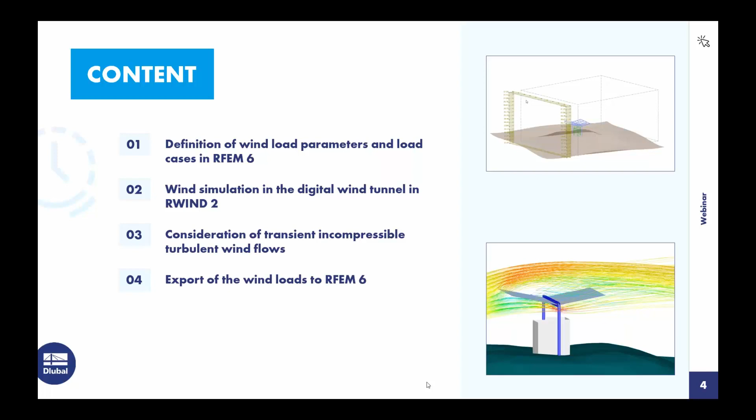So let's jump into RFEM6 and load a model. Generally, I'd like to show you directly how we can set up such a model, but I only have 1 hour for this webinar, so we have to start with a prepared model.

So this is my canopy roof here, and I scheduled that we open it in this style with rendered cross sections, with many supports, with dimensions, and maybe to start with a question - is it needed or not, or what are all these supports doing?

For questions, if it's unclear whether this symbol is needed or not, in RFEM6 we offer many tooltips - we implemented a lot of tooltips. So just draw your mouse pointer over elements that are unclear and you will get a hint what it's about. So you see here it's an effective length setting - a visualization for the buckling length input for the design.

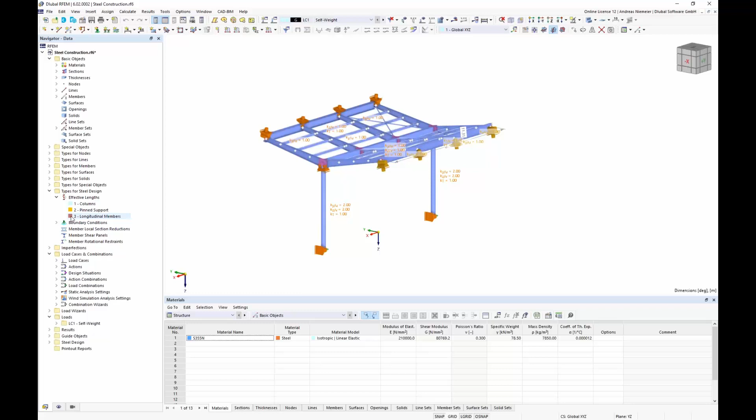This brings me to the point to show what this model is about and what we predefined. So we predefined, or RFEM6 did it already - we had here already design settings for columns, pin support members, for longitudinal members, and for the wing members. You can do a full design if you calculate all. If you don't need these symbols, you deactivate it to see what the point is.

Our model - you see we have here a circular hollow section as a cantilever column, a box section with a big torsional stiffness, and here tapered I-sections with a cap member, also an I-section, and with some filling members, what about C sections. This is our model, what we want to design today.

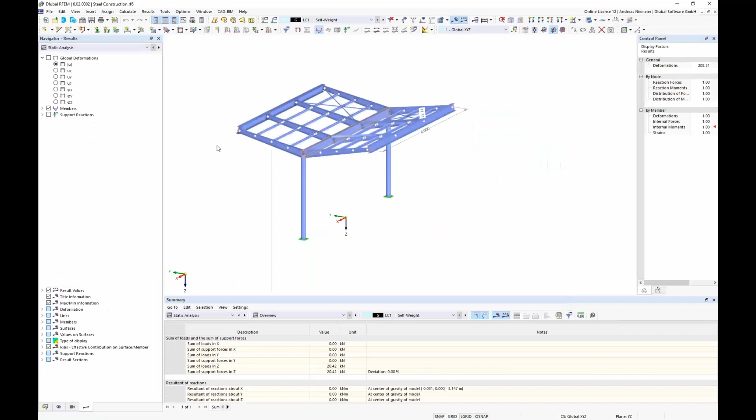If we take a look on our load case list, you see what our author of this model already did. We have here a self-weight load case, and if we calculate this self-weight load case, we get the load case results plus a steel design, meaning we get our bending moments from self-weight load case.

So you see here bending moments, normal axis forces, but also a steel design. If I calculate this model only with steel design, for this self-weight load case we get a utilization about 7%. Not much, but it's clear we don't have more loads set up.

What is the case of our webinar today? If we go back now to our load case list, we see we have to fill it to get the right design, to get the right utilization for all actions that could appear for this roof.

And we can fill it now with maybe wind load cases. So if you generally have to design the structure, you create wind load cases based on a standard. For this type of model, we know our standard offers us for canopy roofs load schemes that you can apply. This is maybe quite exhausting because you have to calculate resulting forces for every wing and set it up.

Today I want to show you how you can solve this with a CFD-based analysis. For this, you have to prepare our program in a special way. You have to specify the tasks.

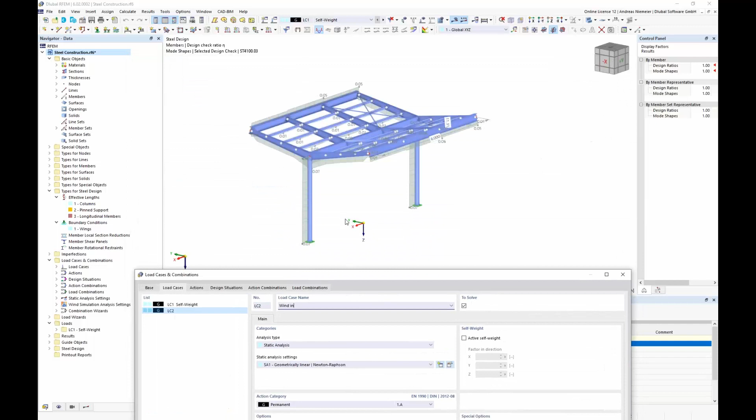For example, Wind in. The question is where, in which direction, we want to design it. Let's take a look. We see, okay, maybe Y direction could be interesting for this structure. So let's write in Y.

Okay, then as next topic we get a lot of options, and you see we have here analysis type: static analysis, maybe for pure structural calculation. But if you open this box, you will see there is a new item, wind simulation. This wind simulation is connected to the add-on wind simulation in the base data, which we just checked in the task.

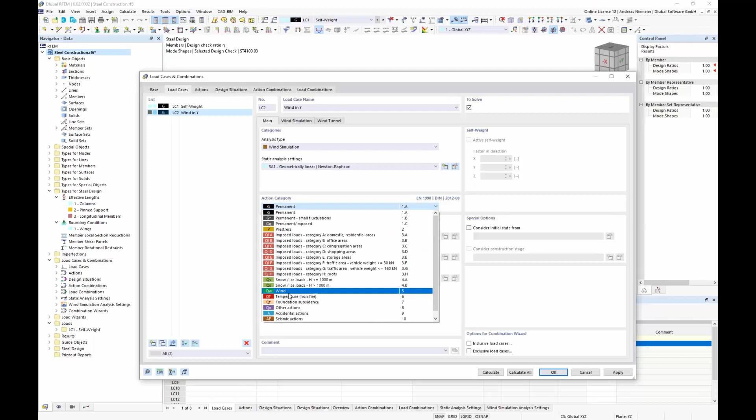If you activate wind simulation, you will get two further tabs for detailed sub-settings: static analysis setting, action category. Action category, of course, could be wind in our case, imperfection, structure modification, initial state. So you get a lot of options, and the question could arise: is this really needed for a CFD calculation? Why do I have to specify here if I want to calculate according to second order or large deformation?

I agree, it's questionable at first, but you have to know that wind simulation is a two-stage calculation process. If you calculate the load case with the type wind simulation, the program moves your model into the numerical wind tunnel, doing a CFD calculation, extracting pressures on the model from the wind flow, moving these pressures back to RFEM and doing a structural calculation for these forces. So one point is CFD calculation, the second is structural calculation. Therefore you have to specify static analysis setting, imperfections, and so on.

Then let's take a look at what is hidden below these two tabs: wind simulation. Of course you get a setting about the CFD calculation itself. Here you see, do we want to make a steady flow or transient flow analysis? So we can say, clear, maybe we call this setting steady flow.

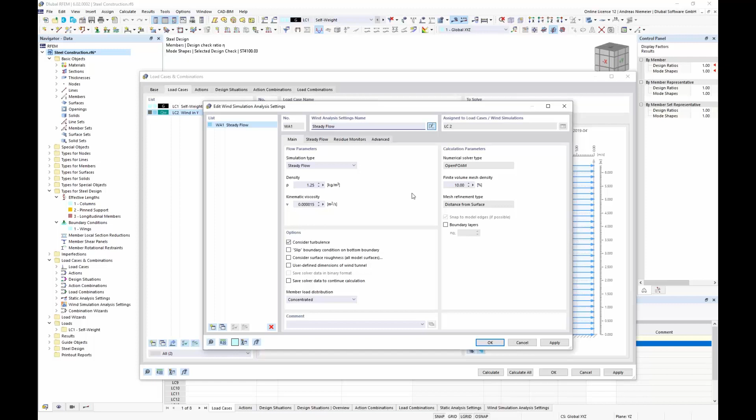Then you have more sub-settings about the steady flow itself: how many iterations, the turbulence model, the accuracy, how big the residual pressure should be, and some advanced settings. So here you specify all calculation parameters for the CFD calculation and can give the setting a name.

Then we specified how the calculation should be done, but the question is, with what the calculation should be done. We know CFD calculation is something like a numerical wind tunnel, and we have to give the program feedback on what it should send into the wind tunnel. Of course wind, but with which speed. Here you get an option to set a wind profile as boundary condition for the wind tunnel.

If we check this data, you will see you have two options. You can pragmatically define this wind speed and turbulence diagram by giving table values manually, or you can create this wind speed diagram based on a standard input. We know all countries have some standards for describing wind loads on specific sites, with existing wind zones or whatever, and according to this data you can create such wind speed diagrams.

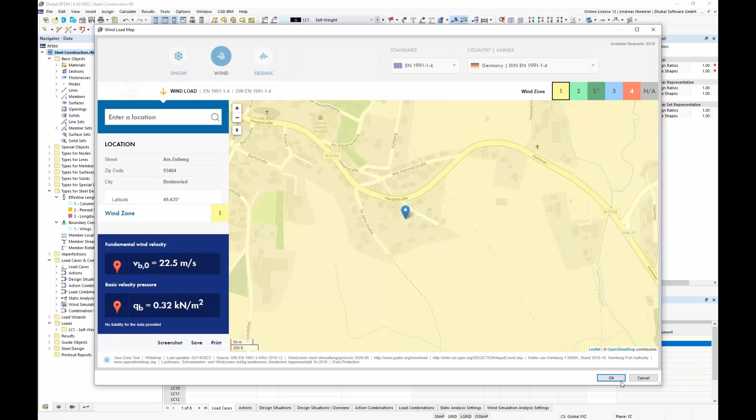We coupled this information of the standards with a map, so you can also click the place on the map. Let's simulate our model in the garden of our boss. Let's search for the place of our company here and zoom in, and place this model here. This overtakes the site-specific data with geo-coordinates, with address, with altitude.

So you can say if the turbulence should be constant or not, and so on. So you specify the input for the wind tunnel. And by confirming this window, you have overtaken it into this setting. Then the program needs, finally, one last piece of information.

We wrote it here in the text: the wind should run into or flow into y direction. It's only a stupid text here, but you have to define the direction of the wind. It's a clockwise direction about Z, which means 0 degree is in X, so 90 degree is in the Y-axis. Now the program knows everything to do such a calculation.

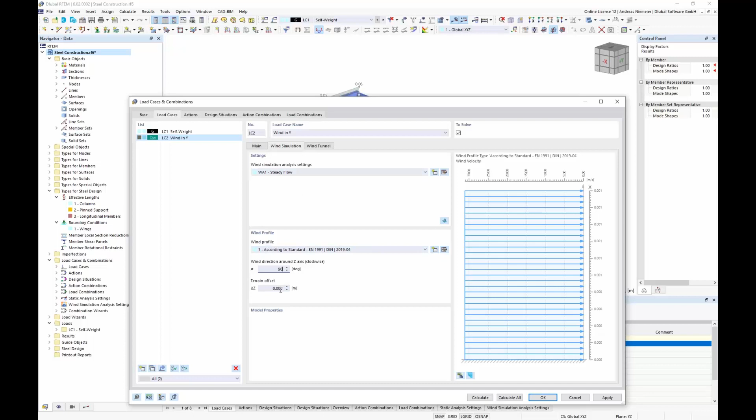So he knows the calculation properties, he knows the wind speed, he knows the inclination, and in the last tab he only informs us about the size of the wind tunnel, because we selected an automatically defined wind tunnel size detection based on the model. So here it's only information about the sizes of the wind tunnel. And if we confirm this window, the program will update the load combinatorics and draw us the wind tunnel in the graphics. You see wind tunnel, input wind speed, and here is our structure.

So far everything looks nice, and we can press the button calculate, of course. But I don't want to do this, because we want to speak about wind simulations in our programs, and I want to show you what is behind. So let's do this two-step calculation of wind simulations manually.

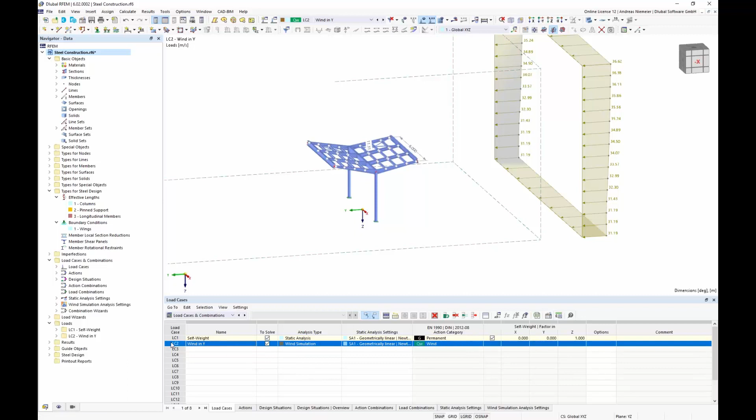In this case, I open the load case 2 again and open the sheet wind simulation, and you see here a hidden button. This button shows us what will be transferred into the numerical wind tunnel. Let's open this. You see here we have our wind tunnel with terrain, with model, entrance, with all properties — steady flow, flow parameters, all calculation parameters — all this stuff is defined here.

And we can start calculation, so I do this, start calculation. This is maybe what is behind: if you press calculate in RFEM, the program will move this model here into the wind tunnel and will press the button calculate.

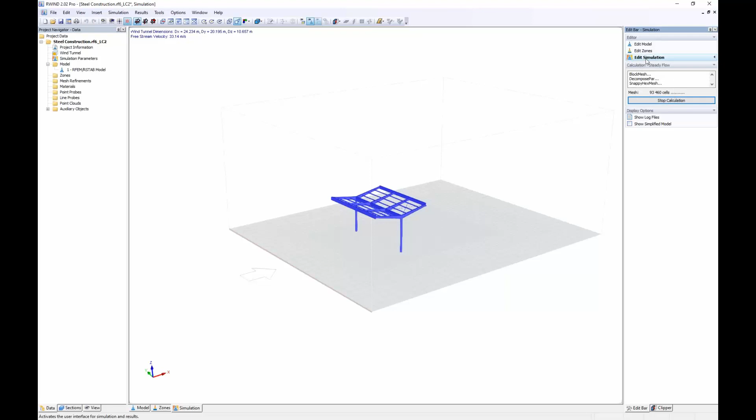Then the process runs down all these steps — it creates a shrink-wrapping mesh around this sharp-edged model from RFEM. We call this a simplification step, and we do this to make it windproof. If you see such things here, this comes from the rough modeling of a structural model, but we don't want the wind to go inside, so we make it windproof — we bind the foil around it.

With this simplified model, which we create from the sharp-edged model, we can create a mesh between this simplification and the wind channel sides around the model, and calculate the flow around the structure according to defined calculation parameters — here, a steady flow.

You see, the process is already running. It's an iterative process, and it ends once it reaches the predefined residual pressure. After reaching this, it will calculate the pressures on this shrink-wrapping mesh around the model, transfer them to the real structure, and prepare forces for the further structural calculation.

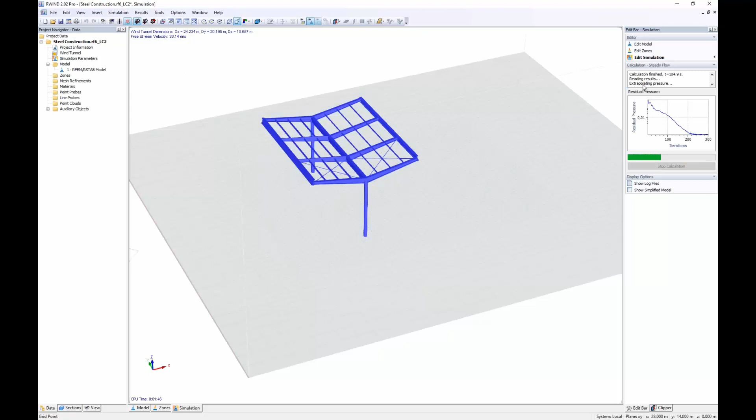So now he finished. You see, he's just starting the transformation or extrapolation process to the original model, preparing graphics, and now he asked me a question: should I change back to RFEM?

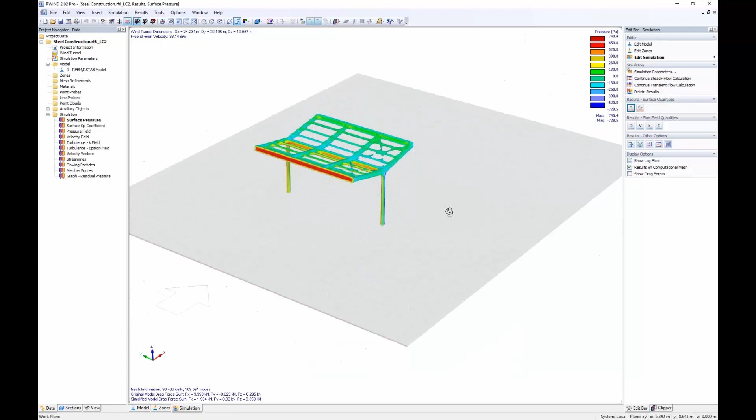Of course we can do this, but we want to take a look inside at what happens. Let's look at this shrink wrapping mesh I mentioned - this is the model simplification. The program makes it windproof by binding a foil around it, calculating the wind flow around this model, and creating from this flow pressures - a pressure skin on this model. These results will be used in RFEM for calculating the structure itself with the wind loads.

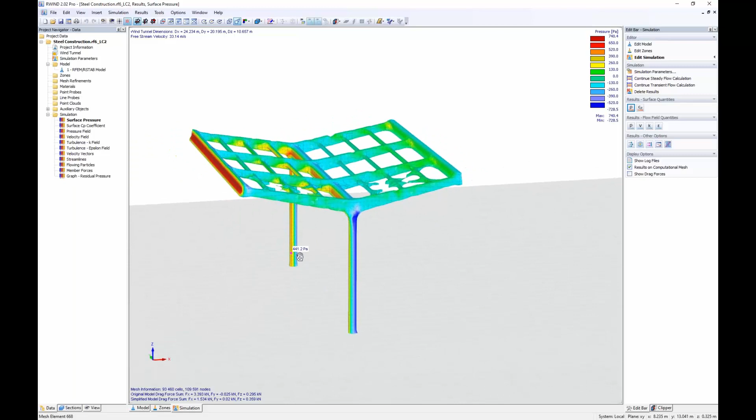But what you see now, and this was my target - if we look at this member structure, we see it binds this foil around, but we also see the wind flow is running through the model. You see it can go through the roof, and this is not real. Structural engineers create these structures without a cover, but in wind calculations you need a cover so the program knows here is a cover and the wind cannot run through the roof. So this is the point I want to show: if you work with structural calculation models in wind tunnels, you will always suffer this problem that wind can run through your model, even with all the tools the programs offer.

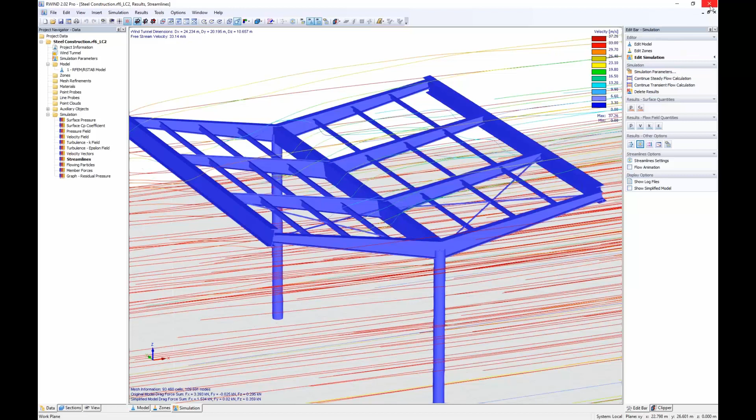The interfaces will only transport the data you send in and not more. So you have to prepare your model for this type of calculation. Here we placed some really powerful features in our new generation to solve this task. So I cancel this calculation, close the window, close this, and go back to RFEM to check how we can solve it.

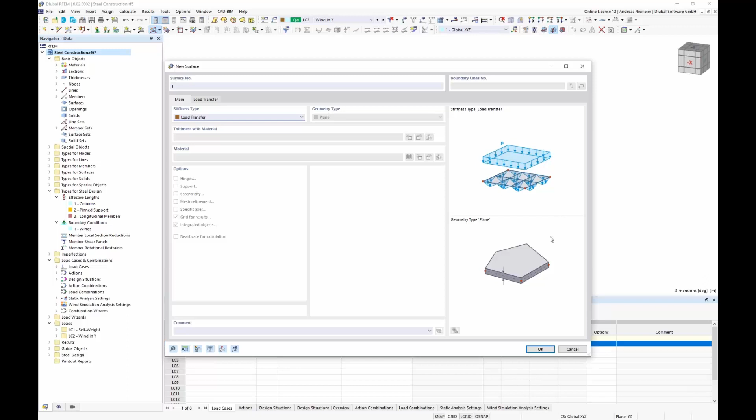For this task we invented a new type of surface. I changed to wireframe model, and here we select boundary and select the stiffness type: load transfer surface. You see this is a surface type with no stiffness, so it will not brace your structure. It only takes loads and transfers them to the members that belong to the surface - which is exactly our topic.

So let's select these boundaries and place the surface inside. Of course the program will delete the results, but this is quite normal here. So now when we turn on rendering, you see we have this surface inside, and we can go ahead with our wind calculation.

But at the moment I said this surface has this property, I haven't shown you how it works. So let's take a few minutes to explain how this surface itself works and what features you have. The first feature of a surface in member structures is that you have a coordinate system of the surface itself, and this gives us the option to orientate members according to this.

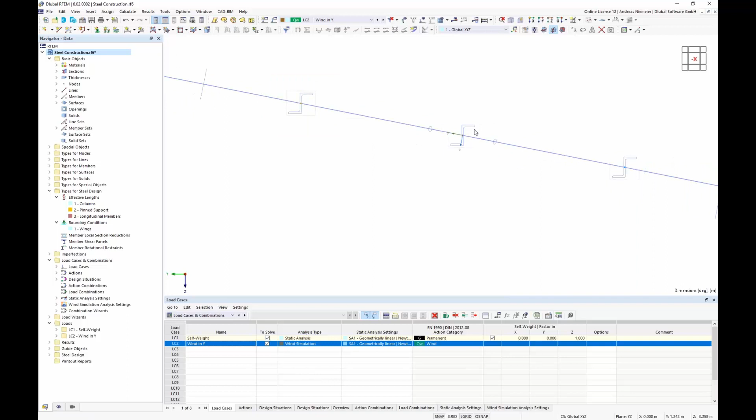So if we check the input, you'll see - oh, the author of the file didn't place these members right. But we can select it now and right click, properties of members, edit, and go to rotation, and you see we have rotation types: angle, and also a help node, which almost all programs have. But we also now have 'orientate according to surface', according to this surface. And this is a really powerful feature because now the members orientate according to this surface.

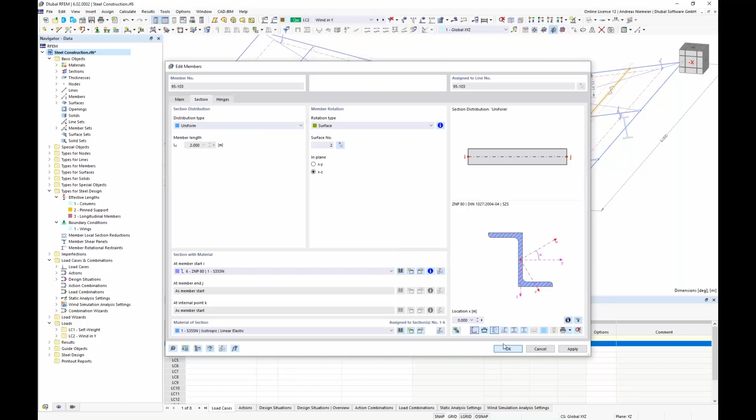The same applies maybe for the other wing side. So select all three stripes, members, edit, and go here to section, surface, and pick this surface. And without calculating any angles, you can place the members in the right place.

Then let's take a look at the power of the surfaces itself. For this, we move load case 2 to 3 and make a gap here. And we say okay, we place here, for example, a snow load, and give it action category snow. Now let's define some snow load to show how this surface is acting.

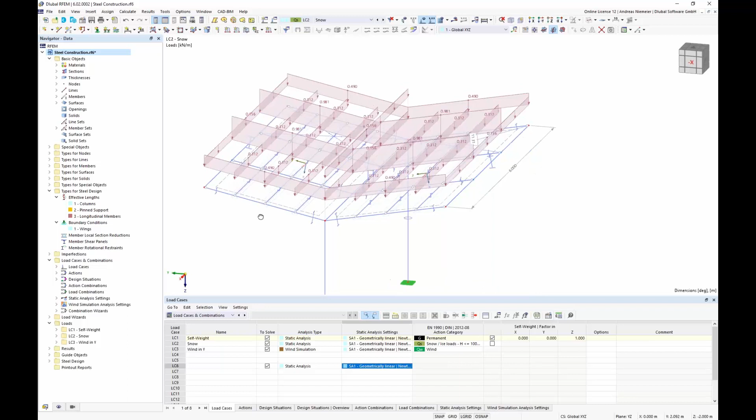Now here we say snow loads are always projected, so projected in Z direction with maybe a unit load of 1 kilonewton per square meter on both surfaces. And you see the program automatically distributes the surface load to line loads, but on all members - not only on the members that would take the load in reality, but on all members that exist.

And here we have some properties of the surface. You see here you can control the view in the navigator. This is our basic load and it will be distributed like this.

And if you want the load to be distributed only to specific members - for example, we want to distribute it in the Y direction - we go to properties, surface, edit, and say load transfer, transfer it only in Y direction, and also give the surface a weight of 1 kilogram per square meter. And you see the view has changed. Now the program changes the snow load to apply only to these filling members, and the filling members transport the load to the wing members.

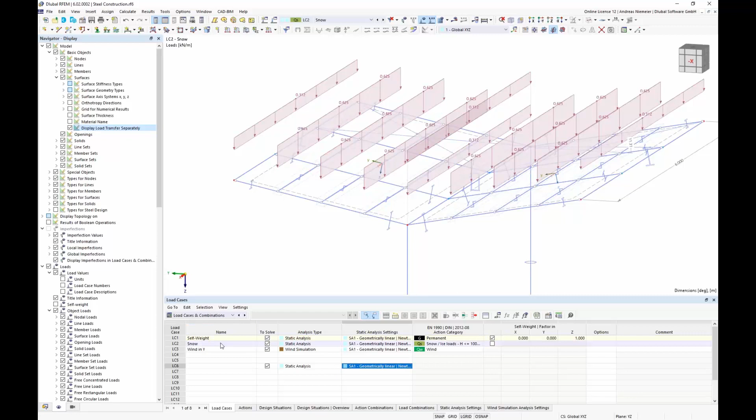And even for, let's say, surface weight, you see this 1 kilogram is distributed over the surface. So the load transfer surface can act integral over all load cases, not only for surface weight and snow, but also for wind.

And this is maybe the target. So you can create now wind models having these surfaces inside. If you check, you see now we have a surface inside and it looks quite good for our simulation. We have a compromise between wind model and structural model.

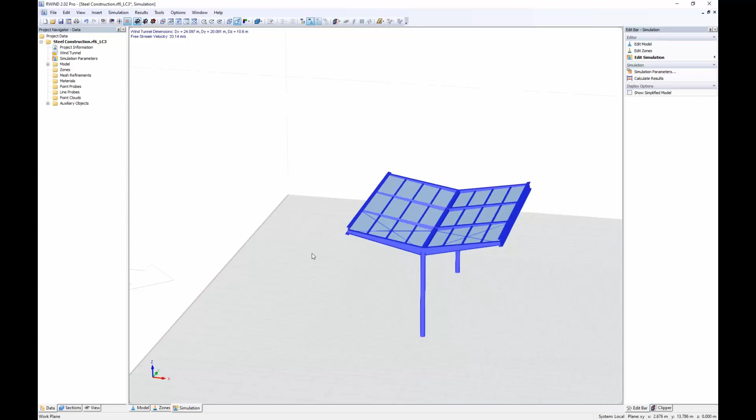But if we take a closer look, we will see the wind tunnel only sees everything. It cannot differ between surface and members. The question is, what is now the point? Generally, the wind will act on the surface, and then the surface gives the loads further to the members. How can we give the wind tunnel this information?

And here our team also invented a new feature, or let's say prepared it. I close this application again, I don't want to save, and jump in. For this we have to open the mesh settings. You see in the mesh settings we have a further tab, wind simulation.

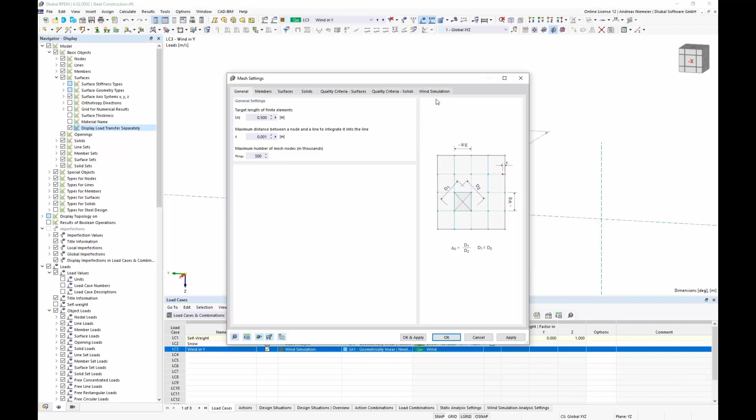This tab rules everything that is transferred to the wind tunnel. It checks the size of mesh, of this shrink wrapping mesh. It rules the mesh near the cross section, if the sections are meshed correctly or maybe quite rough. And here we have a function for which elements will be moved to the wind tunnel.

In this case all active elements are checked. So this means if we say please move only this column, and this column, and these two surfaces, if we make this only visible, then start the wind process, then only this model will be analyzed. And this is exactly what we want in this case. So if I start the calculation here...

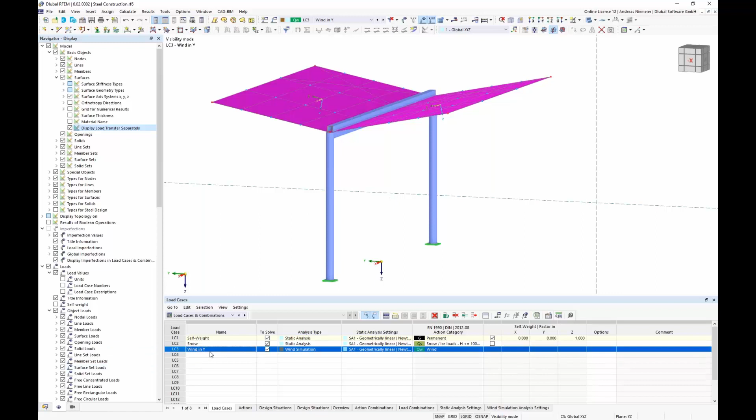Run analysis, from RFEM you see the difference. Here you see two calculation processes. This is a two-stage calculation: at first it's doing the CFD calculation, and in the second part the static calculation.

Always what you select you will see in these information windows. Of course, because we changed the elements with the surface and members, you have to do the shrink wrapping meshing again, and also the CFD flow again. And after he gets this, he does the static calculation.

And to make it more comfortable for you, we transfer even the in-time calculation information, something like this convergence diagram, which is pure information from the RWIND program. We transfer it through our programs so that you see also the reaction of the calculation directly in our program, though they're two independent programs.

And this helps always to understand, do I work with the right model, or is there a convergence issue? I have to stop calculation, whatever. So everything is possible here.

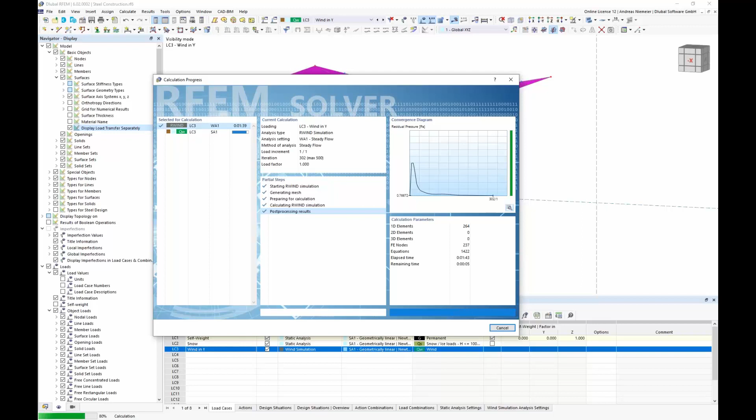Generally, what is important to know, if you're doing calculations with RWIND, it's possible to cancel these calculations and the intermediate results remain. This is especially interesting for calculations which take longer time, so you don't have to wait until the final residual is given—you can stop it before.

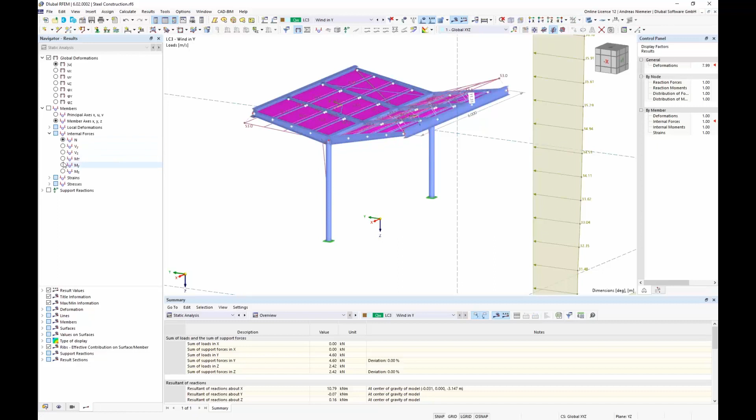But now we define such a rough mesh to have a short calculation time, so that we get directly results. And you see here the program ends up with, let's say, a deflection of everything with forces in the members. So this is the static structure calculation.

But let's make a short check if it worked with the right model. Open the internal information, and you see, okay, the program calculated the structure only with the surfaces and the members, and you see we have our suction on the top, our pressure on the bottom, and the net pressure will be taken over to RFEM. The wind flow is now not through the roof, but on the side, on the upper and lower side.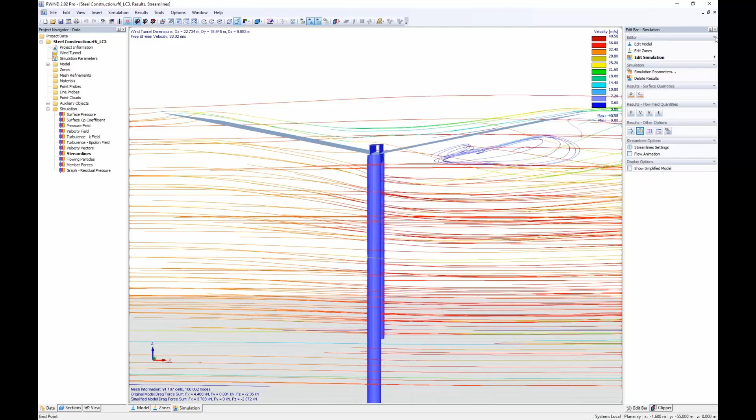So now when we're using these results in RFEM, you see that we get these forces here. And what is interesting, or what I want to show, is if you go to visibility only for the C members, you see these members will get the force from the wind loads. You see here our shear force diagram.

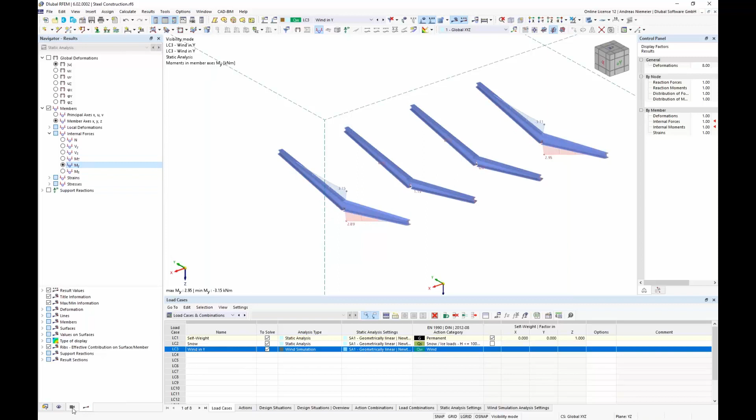You see it working like a continuous beam because I defined scissor hinges here. And finally, they will give their loads to these wing beams as a shear force diagram with a further bending moment. And in the next instance, the columns, or maybe over the box section, the column will get the bending force from the final wind load.

So all this is one integral process, and with this wind load case we can update our load combinations.

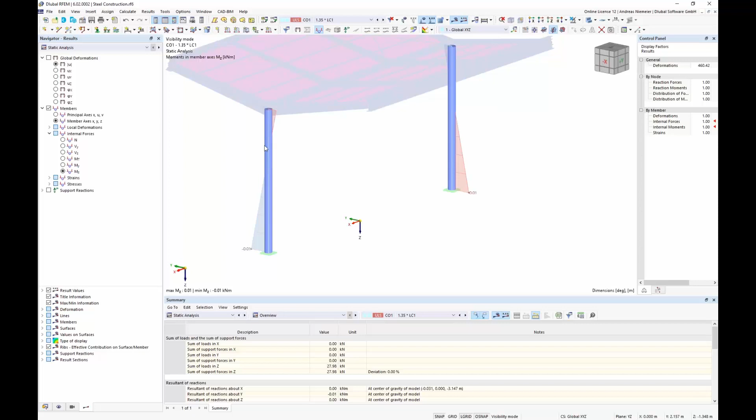So when we go here to our load combinations, the combinatorics will update them, and if we calculate all, we can calculate a design result from these new wind loads. This is the power of RFEM 6, that even the design runs in the background without any action from us as users. Besides static analysis, we get still design, where the program draws a utilization diagram over everything on all members.

If we go here to result by member, you see our biggest result is now almost 50% by considering this wind load case and snow load case we just defined. So now we can sum up the calculation and do the rest. But if we talk about canopies, we always talk about how much wind can flow below the roof, sometimes there is maybe a shading or whatever.

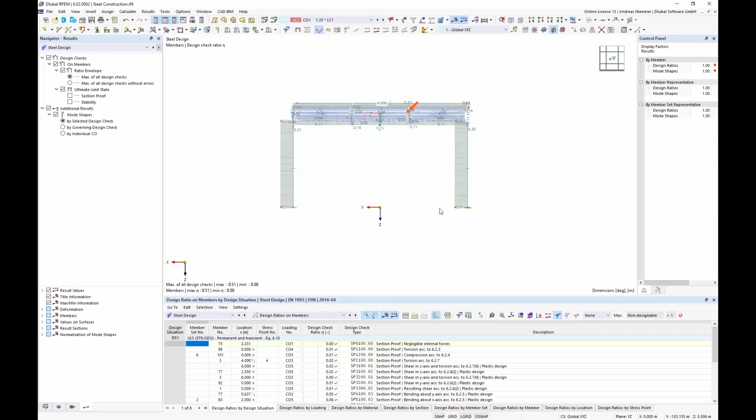I also got some questions in the past about whether we can simulate shadings in RFEM and how we can do this. We talked about it as a team and how we could solve this, and we know RFEM could be used quite well as a modeling machine in this case, so we went in this direction. For example, if we have a shading inside, we can use RFEM for it.

So let's copy these 2 points here and go into a new model, shading 1, and model a shading to see how it looks like. I only have these 2 points so I know how big the shading should be, and let's draw a plan view of this shading.

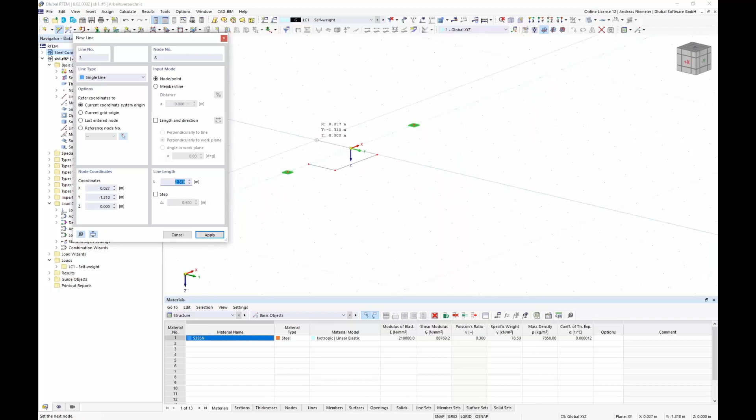Maybe if I compare it with a railway station, you always have such a shading with cavities where people can sit. So we simulate it 2 meters high, maybe minus 2 meters, and copy this step with surfaces, and we have here something like this, a shading box.

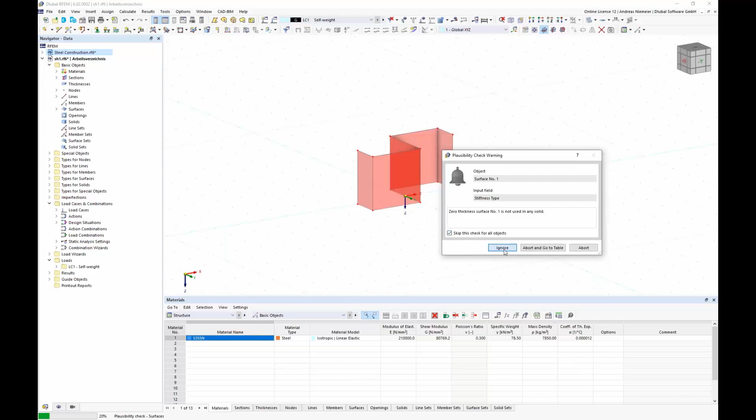This shading we want to simulate in our wind model. For this we create an IFC file from this model, which is really new in RFEM - we can create IFC files. Of course the program warns me because the surfaces have no thickness, but this isn't important here because we're only producing wind models.

We store this shading on maybe the desktop, SH1, store, and now we can go back to the steel construction model and insert it. So we import here an IFC, SH1, and overtake it. You see we have the shading now inside, and it's not a surface, it's an IFC model without stiffness. We get it here in a specific BIM navigator where we can also deactivate and activate some surfaces, but this model could be used for our wind.

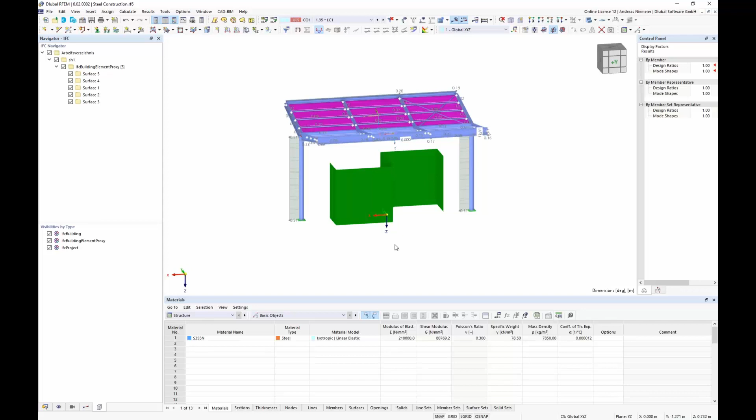As mentioned before, we have mesh settings where we can rule which elements will be moved into the wind tunnel. So if we go to the mesh settings and say wind simulation, surrounding model, all IFC objects, OK, and check our wind input like before, what will be moved into the wind tunnel, you will see we also have these shading elements now inside, specified as a separate model. Here my RFEM model, here my shading element.

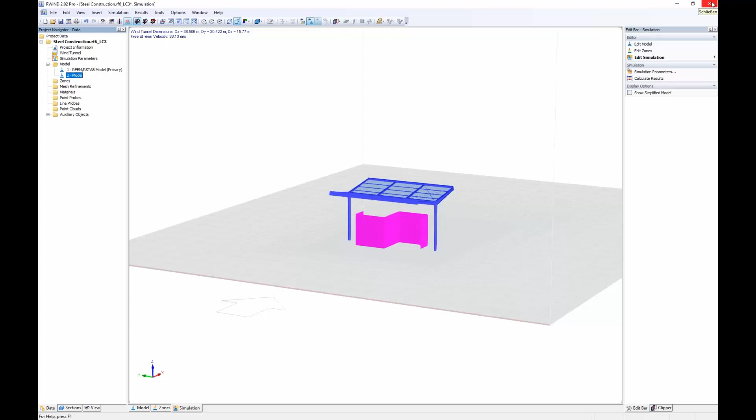This is possible, but this brings me to the question: what about my terrain? We have shading elements, but you can also ask me, can I simulate the terrain? Yes, of course. And should this be defined in RWind or in RFEM? We took care that you can also define terrains now in RFEM. Let's take a look at how this is working.

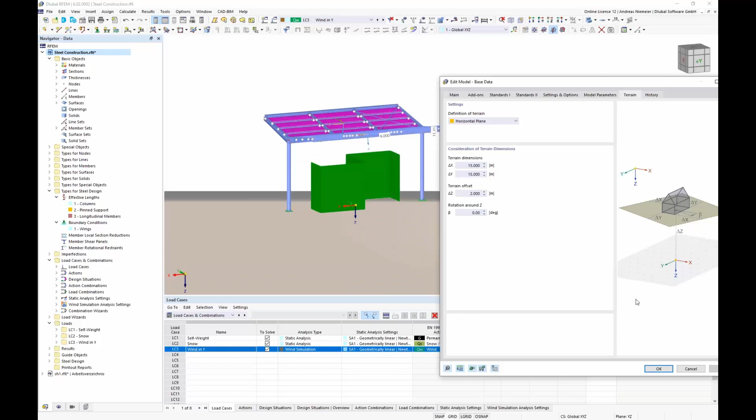Because terrain is quite a global setting, we placed it here in the base data. You see you have here a tab for terrain where you can say I have a horizontal plane - we can set it here, we can move it, we can say move it 2 meters down. Or we can say let's take an inclined plane by defining a coordinate system which we rotate maybe 5 degrees around X. So all this is possible.

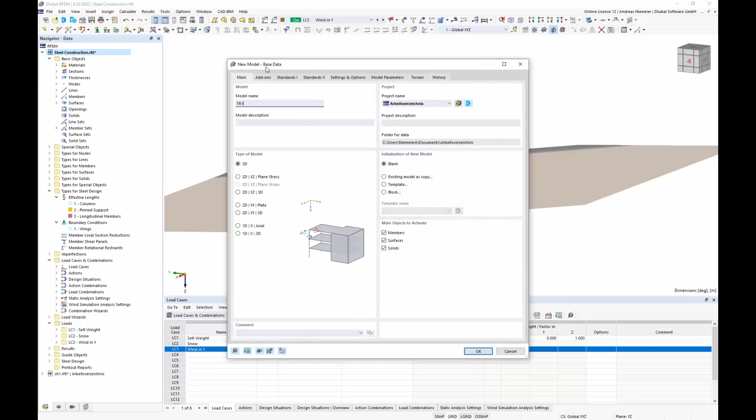We can specify shading elements and terrains in RFEM. And if you say I have a more complex terrain, not only a plane or an inclined plane, that's also possible. For example, let's model a terrain, and as mentioned before, you can use RFEM as a modeling machine for it. So let's open a new model, TR1 for example, and specify a grid of nodes.

Maybe I know for 15 by 15 meter quadrant segments. So let's copy this node here 3 times in X with 5 meters - you can also use 1 meter, but it's up to you, it's just an input - and here with minus 5 meters. Let's take all, copy this row 5 meters in Y direction, and now finalize it here with copy in the minus direction.

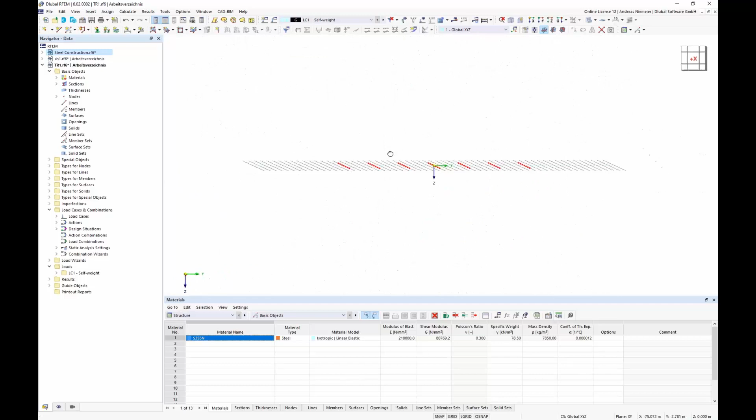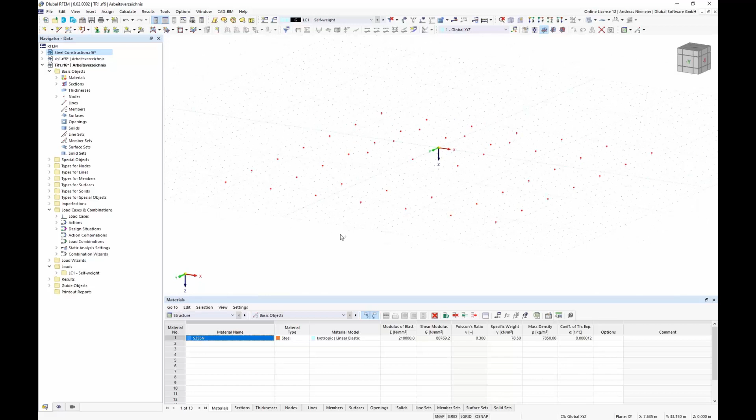Now we have all nodes in this scheme here, and we can model a terrain with these nodes. So for this, I take a top view and select all nodes. We select all nodes, deselect maybe this top level, and move the other nodes, for example here, 2 meters down. If we check this, you see this is maybe our level. On the top our roof is standing, and then the program should create the terrain in this node set.

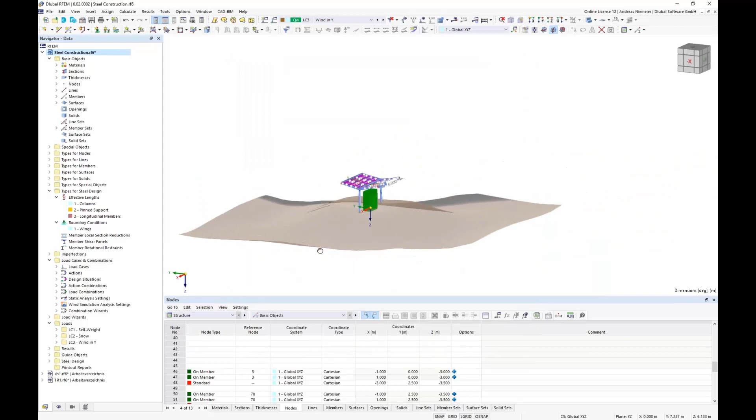For this, we select all nodes in the table nodes, Ctrl-C, go back to our model, and go back to base data, terrain, and say here, table. Here we have this basic terrain dimensions, how big it is, and here we have a table, and we Ctrl-V, and we get all properties in, and you see we can also model other terrains, and you can organize it in RFEM. And if we say now in the mesh settings, wind simulations, terrain, no IFC objects, only from model, then the interface knows when it transfers data to the wind tunnel, even the terrain should be considered.

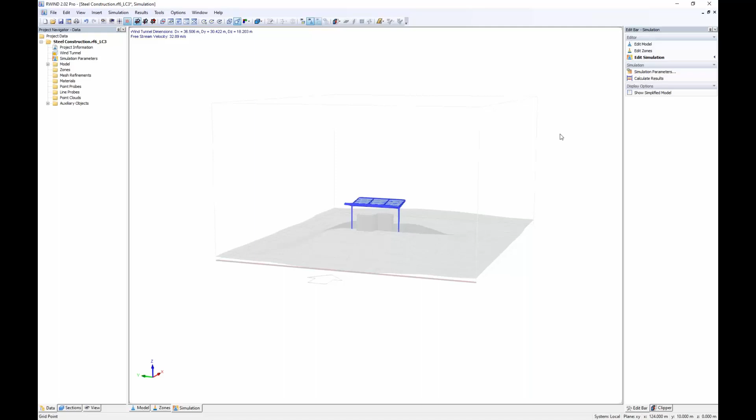What helps is that now we have the tools to make batch processes for different wind directions. What brings me to the next point: therefore, we need to have all this data in RFEM, so that we can just move this data to our wind tunnel. So let's find a solution for this last task.

So I just mentioned, now what happens if we have the shading and we want to simulate different wind directions. Should I define all these wind load cases manually in this load case list with different angles? Of course you can do this, but this is boring work. For this, I recommend let's delete this load case.

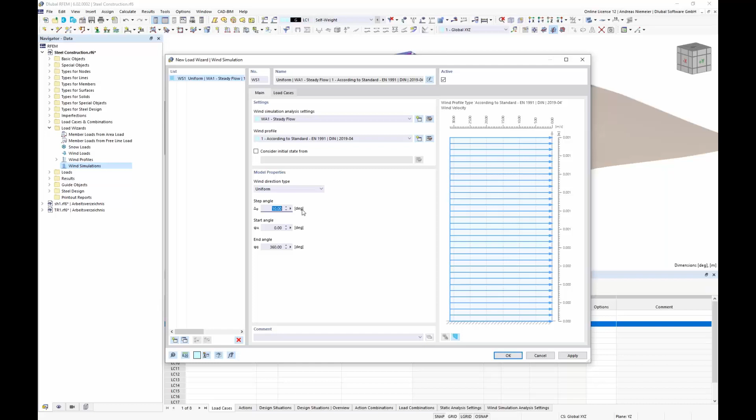And go to the wizards. So go to wizard, go to wind simulations, and here we have a tool which creates for you, for a specific calculation setting what we already defined for a wind diagram, more load cases. We can say we have a step angle of 15 degrees and it should start from 0 to 360 degrees. And with this wizard we get these load cases for every 15 degree segment automatically. No big deal, I would say.

If we confirm this setting, we have all these load cases here. They are blocked and are based on this wind setting. Now we can start calculation. I don't want to wait with you for this solution, therefore I prepared this data in an already calculated file.

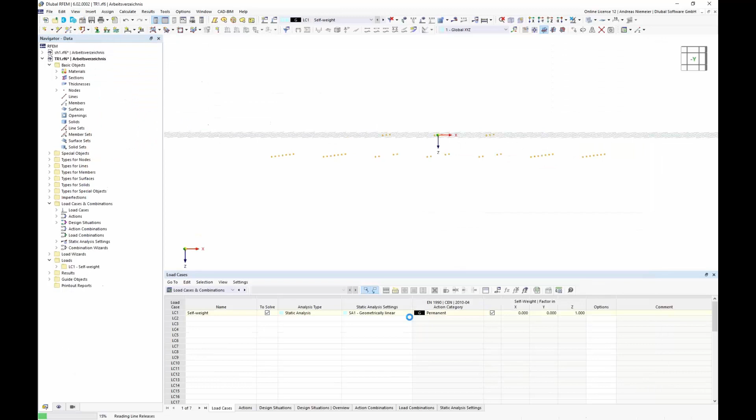So open this model here, steel construction with 15-degree segments, and take a look. So here is our result with the terrain. You see we have here static analysis settings with forces already, and if we take a look here on these load cases, you see if we take a top view how the wind tunnel is running around the model. Quite impressive, I would say.

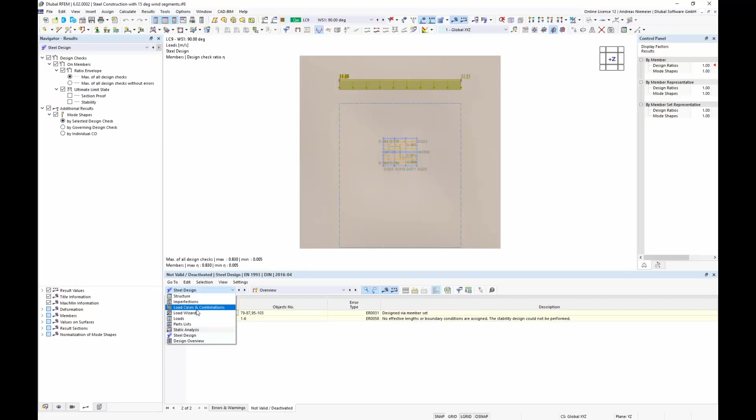And for every load case we get these CFD forces for further design. And if we go now into a calculation, run all steps or calculate steel design, then the program updates the design. Of course, if you check load combinations, you see the program is checking maybe with snow as leading, then with wind as main force, and with wind as leading. All situations will be combined together.

This results finally in a steel design result by nearly 83%, where you get from our tool not only a figure, but you get the result for every member separately. And if you are interested in which leads to the biggest result, you see CO21 is governing here, and this check gives you this utilization.

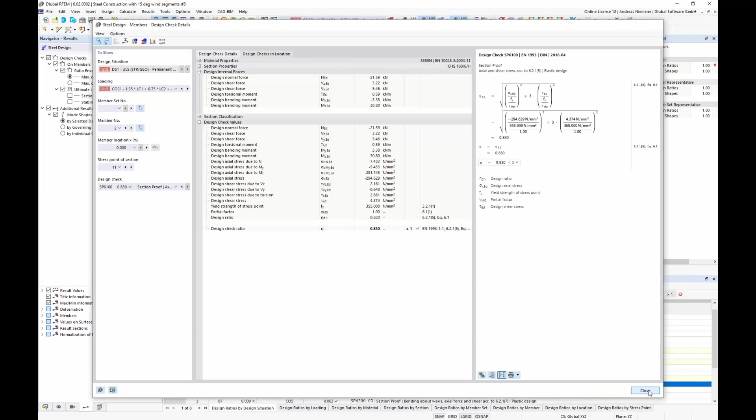So this main connection ends up in the case that you see how you can specify wind situations, how you can create wind load cases in RFEM 6, how you can move data into the wind tunnel and get results back for further structural calculation.

And I have now one point left, what is about calculation options of the wind tunnel itself. As mentioned before in the introduction, we have let's say worked since the introduction of RWIND with a steady flow simulation type, what gives us the average time solution. We extended it now with the pro level of RWIND, so that you can also calculate the transient flow analysis.

Here in the interface for RFEM, you can change the setting or create a new one, and all wind load cases will be updated with this calculation setting. Of course, no big deal. But the question is now how this is looking like in RWIND itself and what we get as a difference.

Before, you saw when we checked our wind results, you get always for one time step or for this average time step, one solution as a time average. And now we calculate also results over time, and this is looking like this. For this I open a RWIND model.

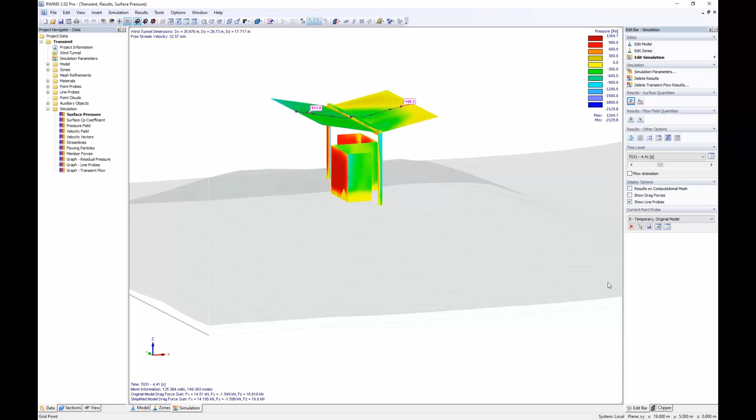Now, as mentioned, as different to this steady flow calculation, here in the settings you get, if I start a transient flow, this setting is changed. Transient flow means now that we can calculate not only one solution, what is average, as we detect before the calculation, according to model properties, a simulation time. We found an algorithm to find out the suitable simulation time. So here the program recommends to calculate an 11 second period for this model with time steps of 0.21 seconds.

And this results finally in many time results, and here you see even the change of this transient solution. For steady flow you got one result, what is the average, and now you get for every time step an individual result.

For the transfer of data to RFEM, this is, let's call it status quo. At the moment I can only transfer one time step, what is declared as master time layer. What I can specify here, what is the master time layer. But in our RWIND, you get all results here with these different time steps until the 11 seconds.

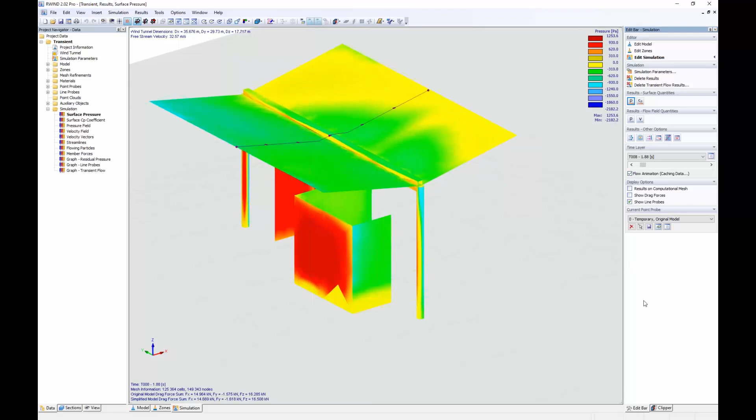So if I change here, you will see the colors will change in the graphics. Let's go to another, and you see values and colors are changing. Of course, I can change here even in this bar, or I animate it. You will see how this wind flow over the time of 11 seconds will change the pressure on the structure, which has of course effects on the structure calculation also.

So this is one effect. Of course, you can visualize it also with other results around the model. So here in this case you see maybe the magnitude of wind speed, and if you animate this, you will see how the magnitude is changing around the model, which finally has effects on the pressure on the model. But for me, of course, these are colorful pictures, and if you are the designer of such structures, you need more than such colored pictures.

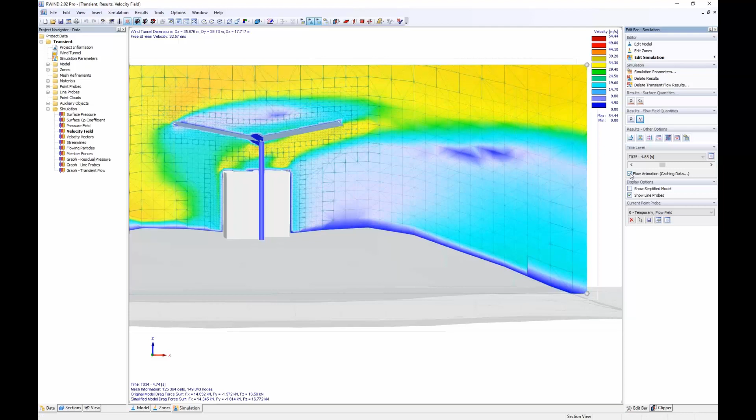So even if you visualize maybe these vectors of wind flow, where you see these, let's say, turbulences, or not directly turbulences, and the wind directions are changing, you can visualize it here over time for this 0 to 11 seconds.

Of course, this is maybe a lot of data what we have here for this model and for this space around. But if you are interested in detailed results, which I absolutely understand, if you have to decide if it's good or not good and so on, you get more tools in the program RWIND, and you will see these more tools in this navigator.

You see, we have here in the navigator now zones, materials, point probes, line probes, point clouds. All these tools help you to investigate the data. Let's start from top to bottom.

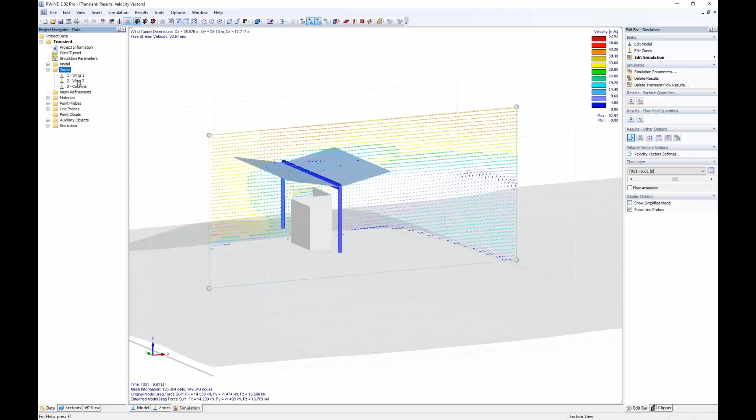So what you can do with zones: you see, I predefined here already 3 zones, and maybe you saw also here a zone display mode. My cursor selects now elements or model or terrain and shows directly which zone. So this is zone 2, zone 1 - zone 1 is wing 1, in this dark blue, this green is wing 2, and 3 is columns. What I have here predefined. All others is zone 0.

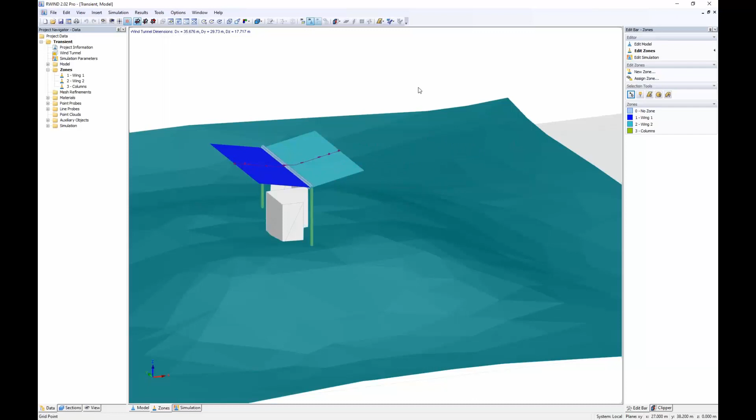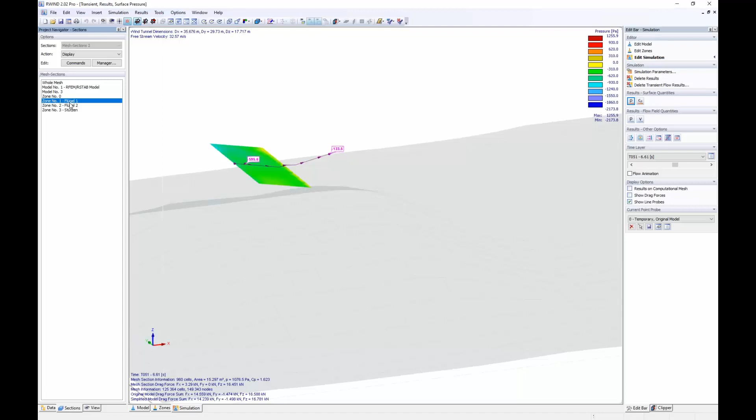Of course we can create new zones, so this could be a list what is longer and assign these elements to it. But what is the goal of it? The goal is that after you defined these zones, you can visualize only this one zone or the other zone. You can do this with results - if you say, show me the pressures on the model, you see maybe only the pressures on zone 1, zone 2, or both.

You can do this for the surface result or also for drag forces. So you see here the drag force only of this zone, drag force of the other zone. So even this is possible, and not only to sum up everything to one drag force. Then if you go back to the navigator, you see if you go to zone, you go to edit and see in the info box the size of the zone, the drag force of the selected time step.

Here quite interesting: average pressures over the zone for the full surface, for the top side, for the bottom side, and the same for the CP coefficient. So all this data is here summed up per zone, which is interesting for interpretation of your model.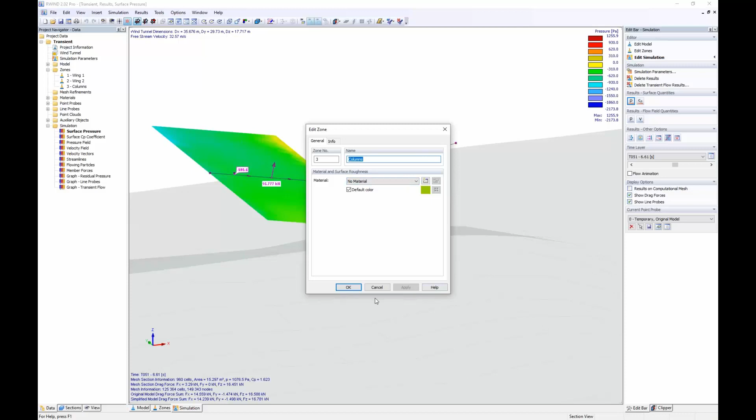Then, of course, the zones have a second task also, connected to materials. I have here a material defined for the roof roughness, with a sand grain roughness of 2 millimeters and homogeneous distribution. This roughness I assigned to the zones of the roof, saying please use roughness of material 1, and the same for roof side 2, but not for the columns. So you have control to distribute different roughnesses in your model, which affect the wind flow around your model for the calculation. Even such a task you can solve with these zones and materials.

Now, if you have to investigate your model and decide if the values are interesting, or if you need a finer mesh or whatever, sometimes it could appear that you need some special values on a point. Of course, you can use your pointer and draw it over the structure to get the values, but sometimes it's interesting to have always the values on the same spot, something like this bubble here.

I defined here 2 point probes below the named center of wings, where I said these are my 2 points, and I can create here tables with the pressure upside, pressure bottom, and CP values. All this data is summed up in this table, and graphically in these values, which show me the bottom value and the top value.

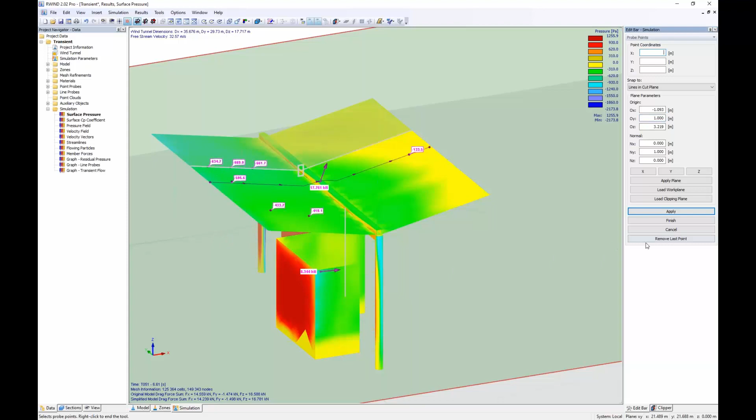And of course you can create more of them. You can say let's create a new probe and set it graphically, maybe here and here, or on a specific place with a cut plane, say use a cut plane here at 1 meter, and you want values on a specific line. It's also possible, and you get these values documented as point probes, with values for the specific time step. This is interesting for steady flow analysis.

If you have a transient flow analysis, these values can change over time, and this cries for a diagram. So here use this button for diagrams, and you can open it. I call it the diagram machine. You always have on the x-axis the time layer, maybe from 0 to 11 seconds.

You can say here what you want to visualize. On one hand, of course, the drag forces, maybe the full resultant, or only an X component, Y component, or Z component. And you can say for what: maybe the whole model, for wing 1, wing 2, or for columns. You can select what you want for which quantity.

This is only for drag forces, but also for these point probes we just defined, maybe for point probe 1 on front center of wings, and the same for front center of wings on the back side. So you can visualize, or create your own diagram, by selecting all these point probes over time. It's possible, and then you have an idea how these values are changing over time for which quantity you select, for example for this CP value or for pressure.

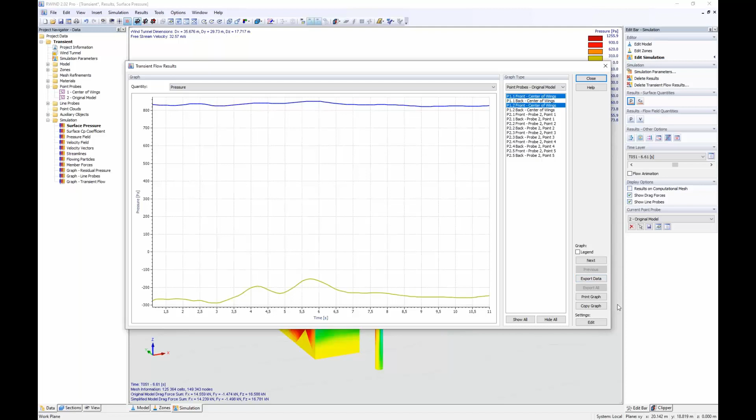And of course you can export all this data into Excel. So this is maybe for nodal values. If you say this idea of having values on one line is not bad, of course we also created here paths.

We call it line probes. In this case, I defined a center line probe according to this path, which gives you a diagram over the length of the path, for this selected time step, for the top and bottom layer of the surface, pressure or the Cp value. Then you can see here you have positive and negative pressure, and how it's changing.

If you are interested over time from 0 to 11 seconds, you can also activate here all time layers, which means you get a spectrum showing from which to which values it's changing. Quite interesting what the time effect is bringing, and here you can investigate it. So the suction effect has a bigger spectrum than maybe pressure.

So if you want to create your own paths, it's also possible. Create here new line probes with this function, graph along line probe. And you can use these cutting planes, draw it where you need it, draw your path and finish. Then you get it.

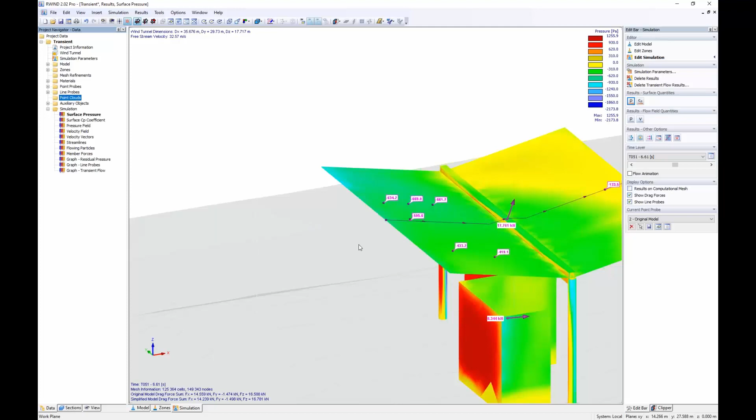I want to explain it with streamlines. If you check the wind flow around the model, you have streamline settings and you can say, please check according to such a rectangle, and apply this and show me wind flow for this following points, or for this segment apply. You can change it like you need, and follow all these points.

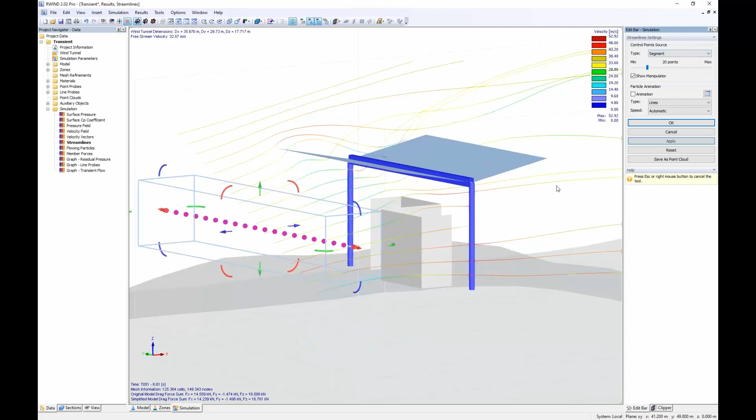But sometimes it happens that you say, I need maybe streamlines for a segment, for a rectangle, and apply on one side, and now you say, what happens on the other side? That could also appear.

And for this we introduced point clouds, for example. Here you can make a new point cloud and say, okay, this is, for example, here for one side. And then you make a new point cloud graphically, which we move to the other side, on this side here.

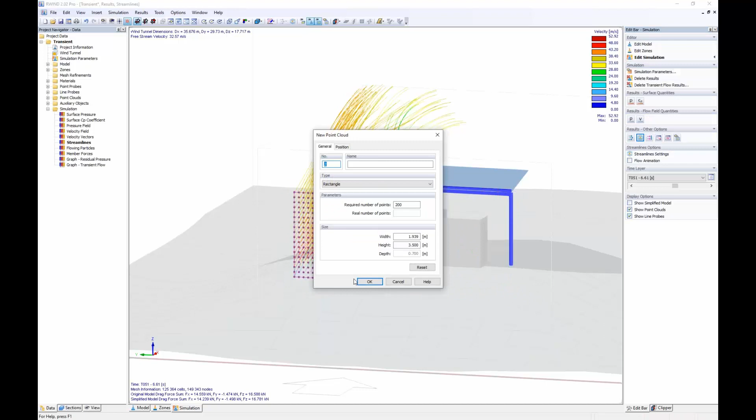And now you can give the streamline settings the job to show it on point clouds 1 and 2, and you get it on both sides. Possible, no? So it's open to you what you create. You can create every step from this multi-dimensional result from our RWIND, and create for your user quite nice pictures or animations to show how this is acting in the wind flow.

And now to my last point, what I want to show you today. So if you have to deal with all this data and you want to document it and process it somewhere else, I always got the question: can I store it in a table or a text file or whatever? And I always said, okay, you can use the data behind because we store it in a ParaView format.

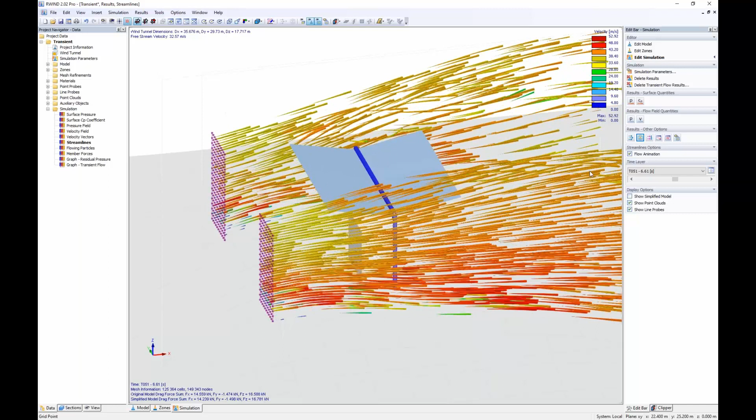This ParaView format is an open source format and fits quite well for these numerical results. Meanwhile, we offered this also in our RFEM, so you can also export ParaView files with all results there. But in our RWIND, you have such an export in ParaView format, and then you can use it by yourself. Let me give you a first view of what this is.

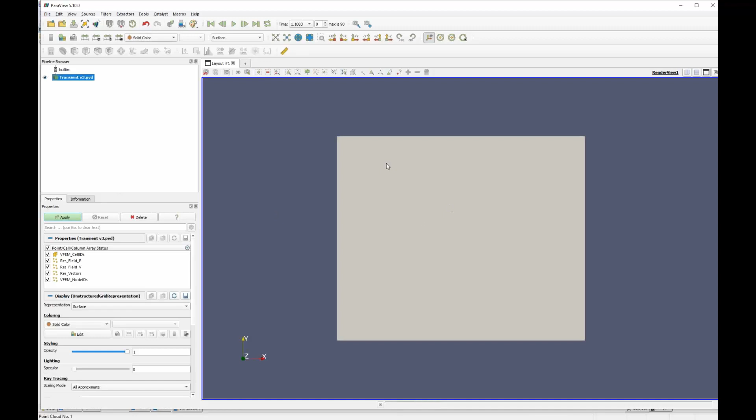Let's open ParaView. It's, like mentioned, an open source program which you can download. And this is, let's say, a visualization environment, and you can load in your data. So open, go to this folder, version 3, okay. And now if you make it visible, you get the rectangle gray block.

No, it's 3D data, and you see, oh, here is our terrain formation. So it's only a question of how you visualize the data. And you can say now for which time step, and which result, for example pressure, and in which type, for example points, outlines, feature edges, whatever. And you see even the result is visualized with a colored panel.

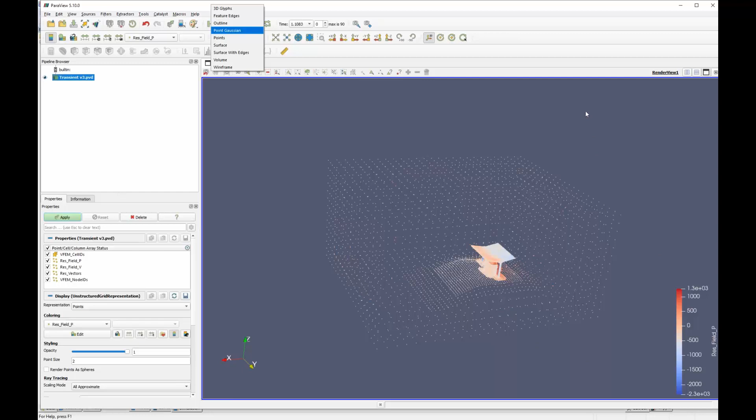So all this data is now inside this file format, correctly sorted for further investigations, and you can use it by yourself however you need it. And if you need a table, open a new scheme and go to spreadsheet view and select this data, and you get a table which you can sort as you need. You see there are more options. I think if you feel familiar with this environment, you can create all views and plots you need.

And this brings me to the end of my webinar today, and I give back to Andreas.